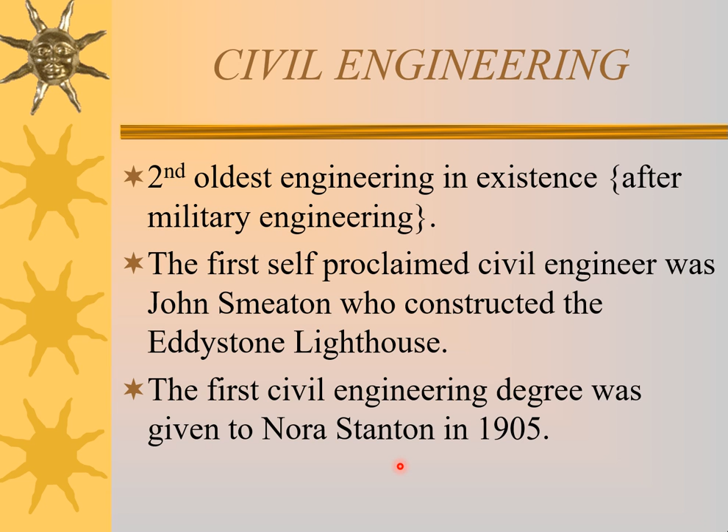The Leaning Tower of Pisa is one of the most successful failures of all time. The architects and engineers who designed it include Bonanno and Pisano, along with other members. For the first phase, these were the members who contributed to making it, and these were the members for the second phase, with the completion done by Tommaso.

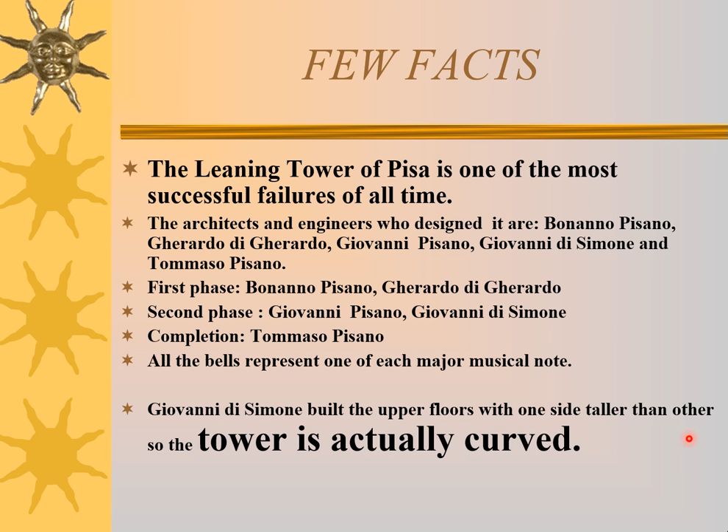Then, all the bells represent one of each major musical note. The upper floor was built with one side taller than the other, so the tower is actually curved.

So what's the history here? In 1172, a widow named Berta di Bernardo left 60 cents in her will to purchase stones and construct a bell tower. It took almost 200 years to complete. The construction was stopped two times, both times due to war.

By 1178, the third floor was completed, and it was observed at this stage that the tower was leaning on the north side, and construction was put on hold because of neighboring wars. The tower kept shifting to one side over the years, around 1.2 millimeters from the vertical every year.

The differential subsidence is 1.89 meters. This means that the extreme north and south have subsided by 1.86 meters and 3.75 meters respectively.

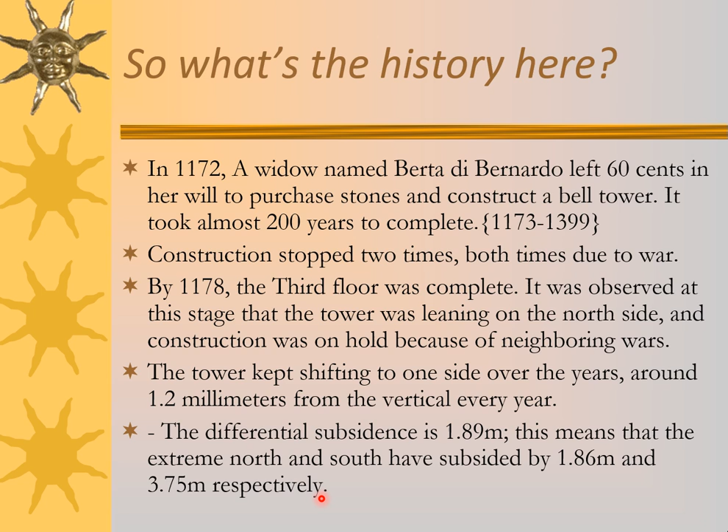And these are some of the characteristics of the tower: the weight is around 14,700 metric tons, the ring-shaped diameter is about 19.6 meters, the thickness of the wall is 4.1 meters and 2.7 meters for other levels, and the inclination is 5.5 degrees to the south.

There are 32,240 blocks facing the exterior and interior of the cylindrical wall structure, 15 half columns at the base, 180 columns for the base, and 12 columns for the belfry.

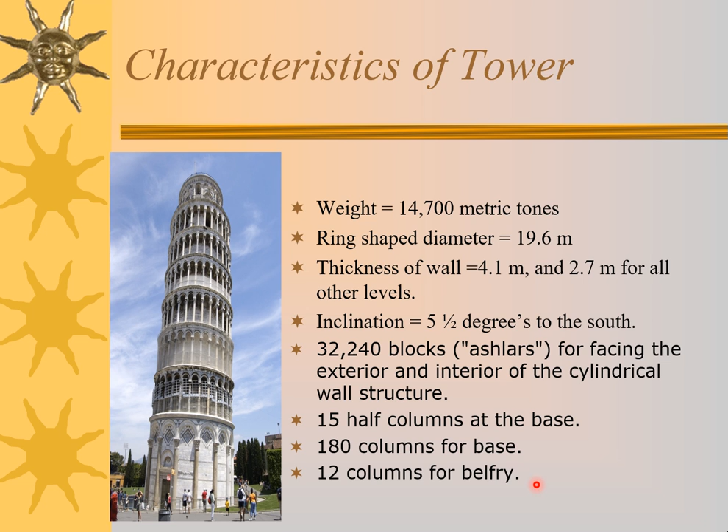So these are some of the initial mistakes made during construction of the Leaning Tower of Pisa. The location of the tower has ground comprised of layers of sand and clay. Before constructing, there should have been a good idea regarding the ground soil condition, since sand is a cohesionless soil, due to which liquefaction can occur and settlement is also possible.

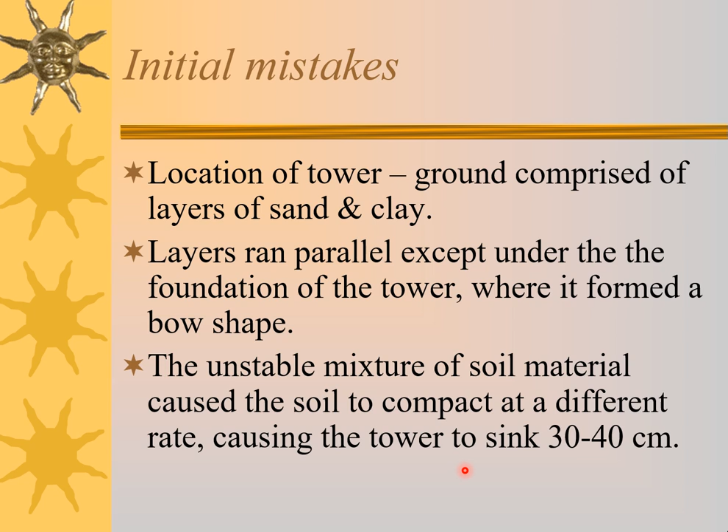These are the reasons why it has been leaning, because of the weak foundation below the ground of this structure, and the soil layers run parallel except under the foundation of the tower, where they form a bow shape. The unstable mixture of soil material caused the soil to compact at different rates, causing the tower to sink. Yes, this is the reason for the sinking of the Leaning Tower of Pisa.

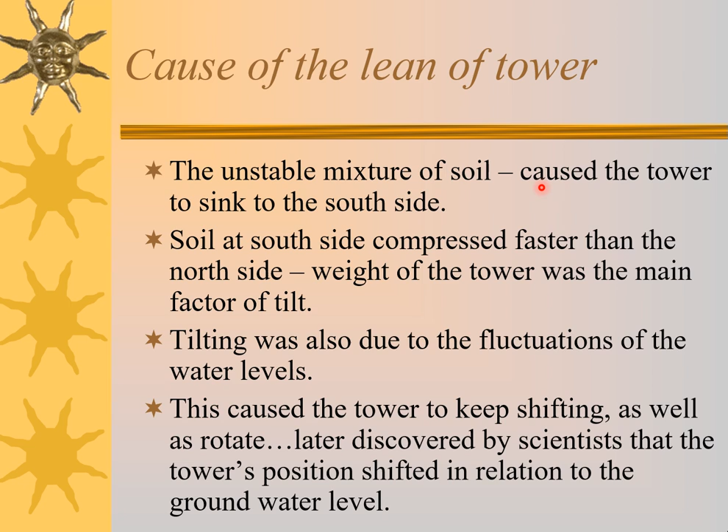So, the cause of the lean of the tower: the reasons behind why it has been leaning towards a particular direction. The unstable mixture of soil caused the tower to sink to the south side, as the soil on the south side compressed faster than the north side.

The weight of the tower was the main factor of the tilt. The tilting was also due to fluctuation of the water levels, which caused the tower to keep shifting as well as rotate. It was later discovered by scientists that the tower's position shifted relative to the groundwater level.

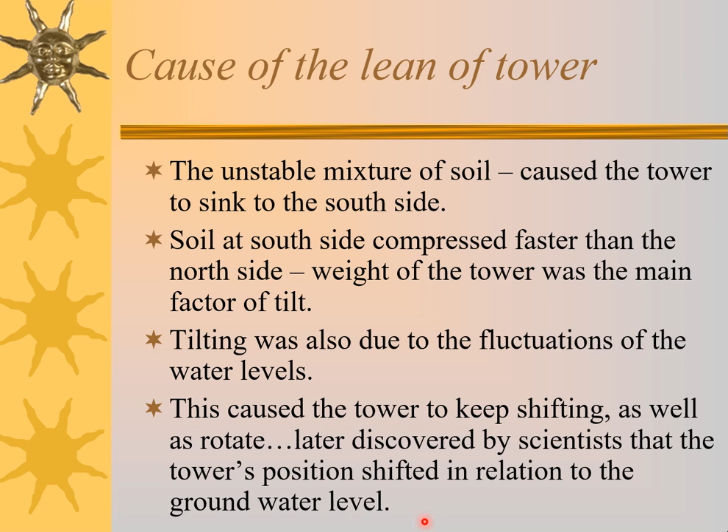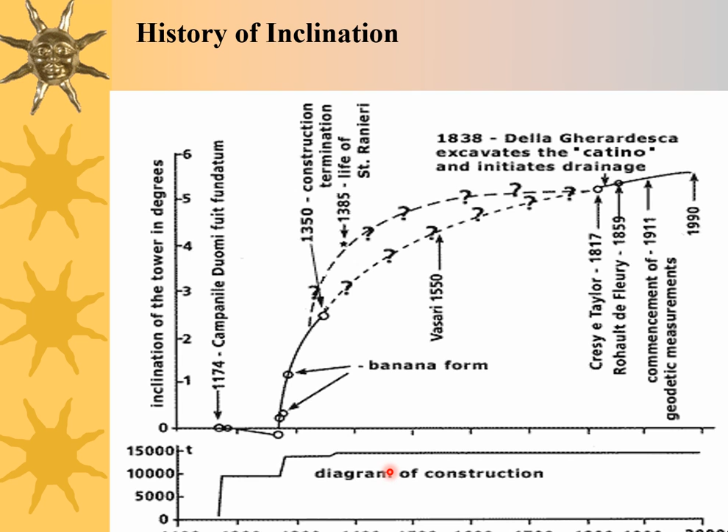This shows the history of the inclination of the Leaning Tower of Pisa, the inclination of the tower in degrees, and as you can see, with time this structure has been inclining. This shows the diagram of the construction and how it has been inclining in a particular direction.

Stress due to lean. What stress developed in this tower? It was thought that the tower would tip over due to the angle of tilt, but due to the support system provided at present, it has been saved, as it is one of the seven wonders of the world. However, it would collapse due to enormous stress.

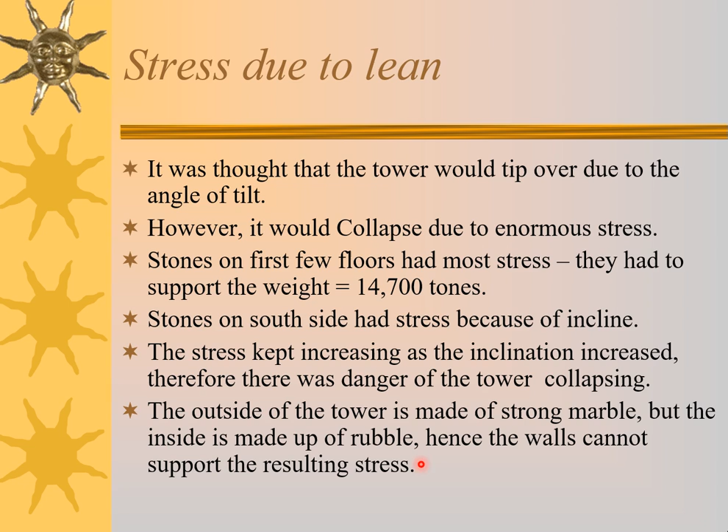The stones on the first few floors had most stress. They had to support the weight of 14,700 tons. The south side had stress because of the inclination, and the stress kept increasing as the inclination increased. Therefore, there was a danger of the tower collapsing. The outside of the tower is made of strong marble, but the inside is made up of rubble. Hence, the wall cannot support the resulting stress.

This figure shows how the tower is leaning. As you can see, it is tilting towards the x direction. This shows the side of the tower where the stress was causing the tower to collapse. Lines around the stairways represent large compressive forces.

So this shows the leaning.

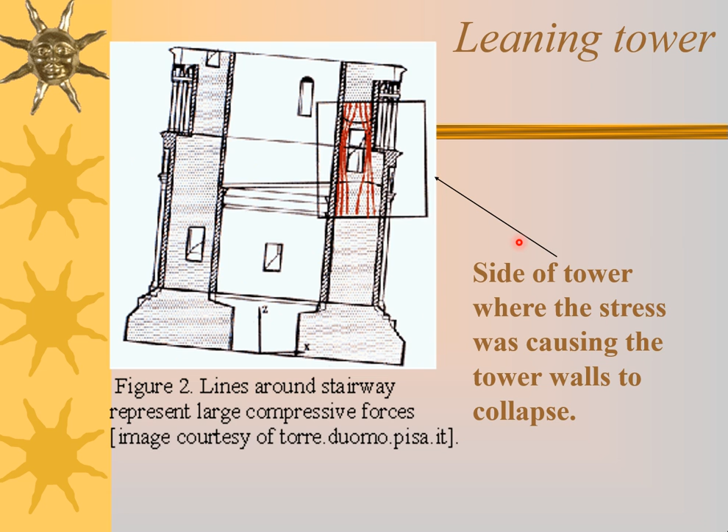Efforts to save the tower: in 1992, plastic-coated steel wire was wrapped around the south side of the second floor to prevent a type of failure called buckling. Buckling occurs when overly stressed walls suddenly burst outward. The tower still continued to incline to the south side.

In 1993, the inclination was halted by stacking lead ingots on the north side of the tower. There was 750 metric tons of lead acting as support.

This caused the weight of the south side to equal the weight of the north side, so that the tower should not lean in a particular direction. By doing this, we have saved the tower.

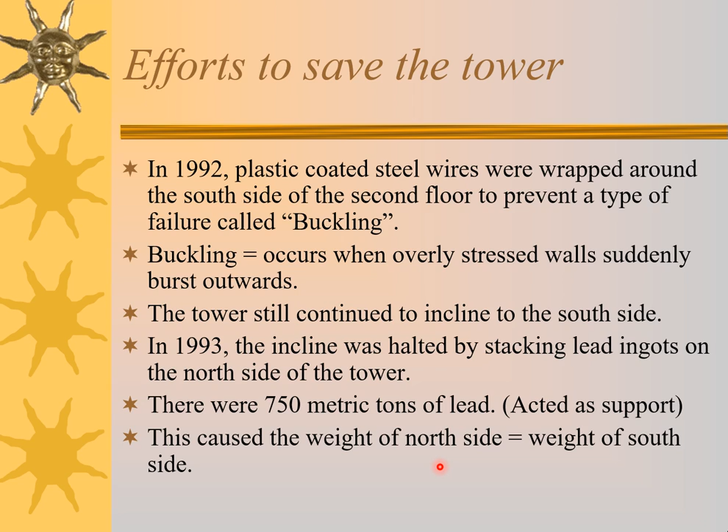So you can see this is the weight acting in the north direction, so that it wouldn't lean toward the south. These are the metric ton weights given here, so that it won't lean in a particular direction. The ground below the south side was no longer compressing faster than the north side. Monitoring equipment was placed and indicated that the tower's inclination stopped due to the counterweights.

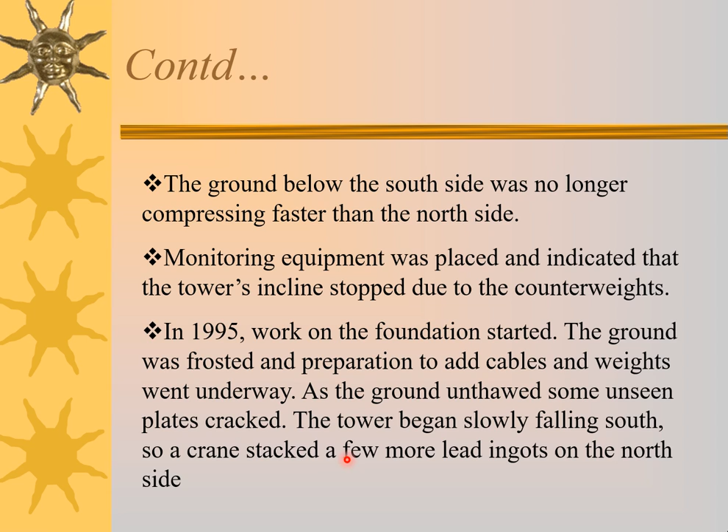In 1995, work on the foundation started. The ground was frozen, and preparation to add cables and weights went underway. As the ground unfroze, some unseen plates cracked, and the tower began slowly falling south, so a crane stacked a few more lead ingots on the north side.

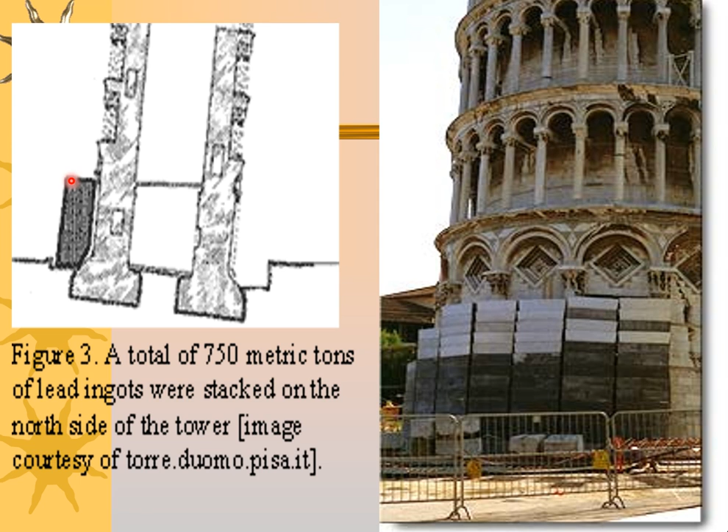As you can see, the tower was leaning in a particular direction. We used 750 metric tons on the left side so that the leaning should stop and it should not collapse. These are the measures which have been taken.

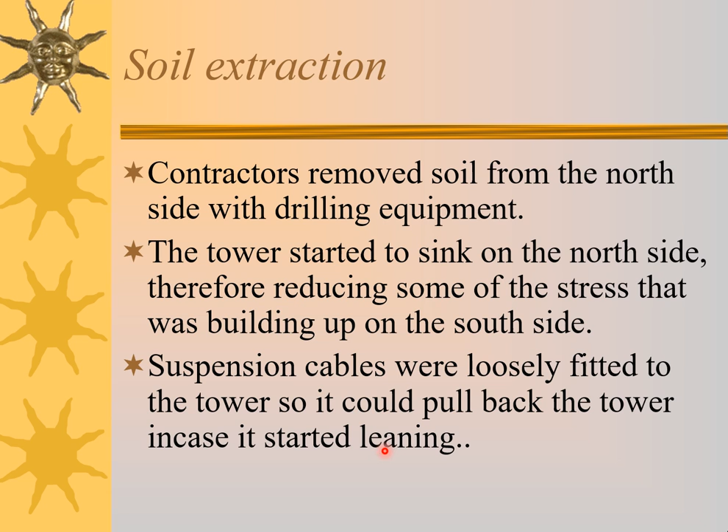Soil extraction: the contractor removed soil from the north side with drilling equipment. The tower started to sink on the north side, reducing some of the stress built up on the south side. Suspension cables were loosely fitted to the tower so it could be pulled back in case it started leaning.

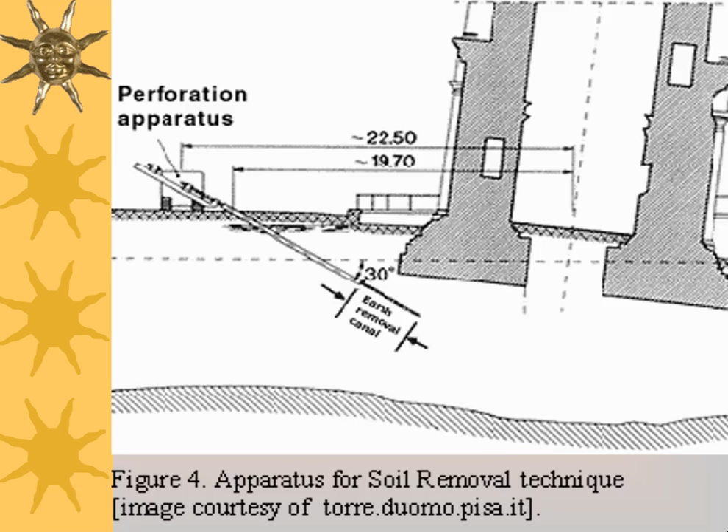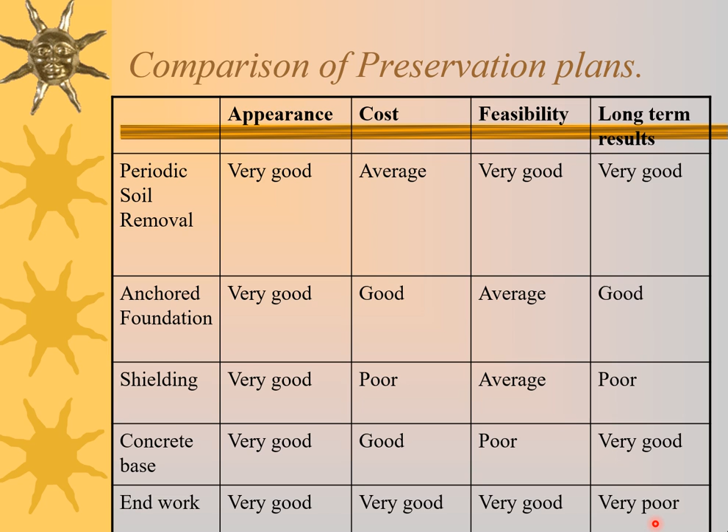So what we learned from this: statics - the tower was built to stay in equilibrium. However, external influences such as the topography of the land caused it to tilt and rotate around its axis. Stress increased on the building as it tilted on the south side. This could have caused the tower to collapse.

Buckling: when overstressed material may burst outward. Engineers must take into account every minute detail when constructing any object. In the case of the Tower of Pisa, the topography of the land was unsuitable for construction.

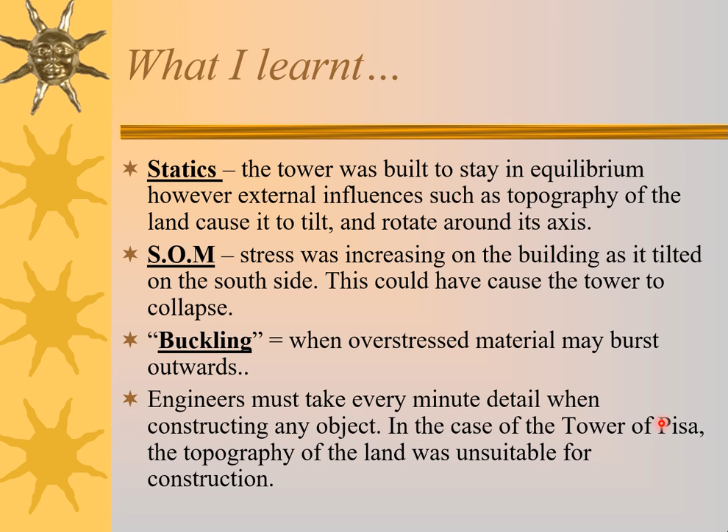So with this, I would conclude this session. I hope you have learned a lot about the Leaning Tower of Pisa. I will be coming soon with a new topic.